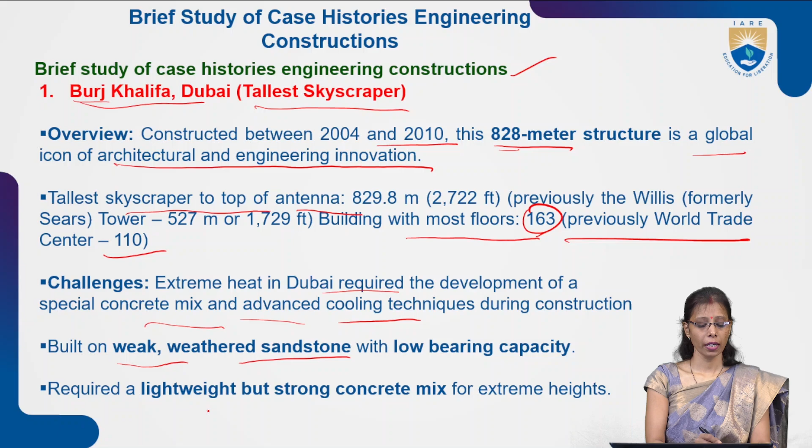The challenge to the civil engineer was the extreme heat in Dubai, which required development of a special concrete mix and advanced cooling techniques during construction. It was built on weak, weathered sandstone with a low bearing capacity, requiring a lightweight but strong concrete mix for the extreme heights. This was the challenge given to the civil engineer, but still they succeeded.

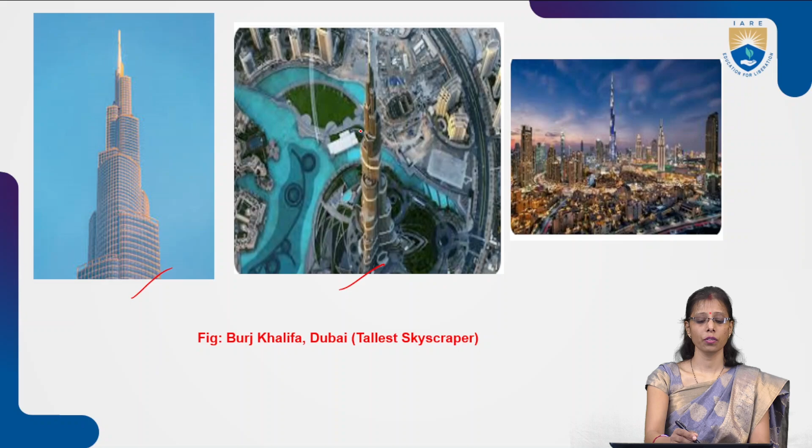This is the figure related to the Burj Khalifa. As you can see, it's a skyscraper. This is how the tallest building looks.

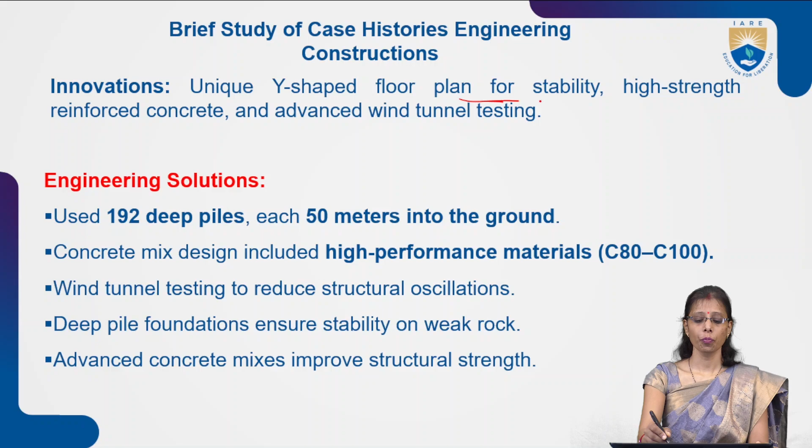The innovation here was a unique Y-shaped floor plan for stability, to make the structure stable. Why did they do this floor planning? Because they had already studied the geology of that area beforehand. That's why this building was successful, using high strength reinforced concrete and advanced wind tunnel testing before going for this construction.

The engineering solution used was 192 deep piles. Piles means they stabilized the soil, since it was sandy soil, by making small piles so the structure stands stable, each going 50 meters into the ground. They made a pile, then another with a difference of 50 meters on the ground, and so on, making 192 piles total to support the structure.

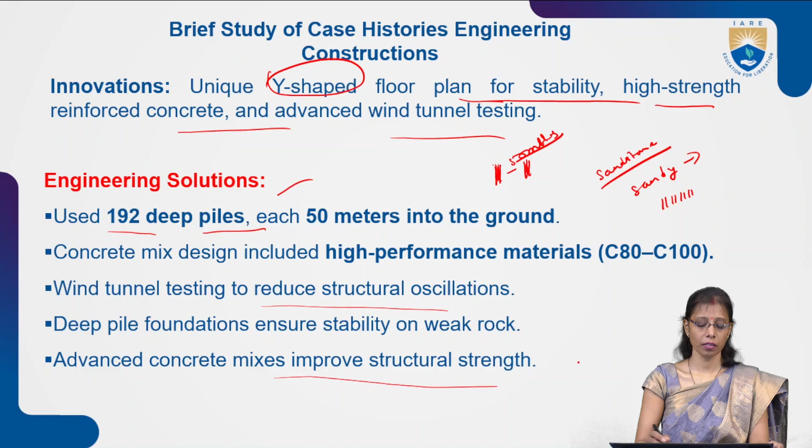The concrete mix design included high performance material, C80 to C100. Wind tunnel testing was done to reduce structural oscillations, and deep pile foundation ensured stability on the weak rock. Advanced concrete mixes improved the structural strength. This was the solution given to this structure.

Next we will see the second famous structure, the Three Gorges Dam.

This dam is known for the hydroelectric power project, located in China, completed in 2012. It is the largest hydroelectric project in the world, spanning the Yangtze River. The challenge to build this dam was the displacement of 1.3 million people, which was a huge challenge to civil engineers and geologists, and also an environmental concern.

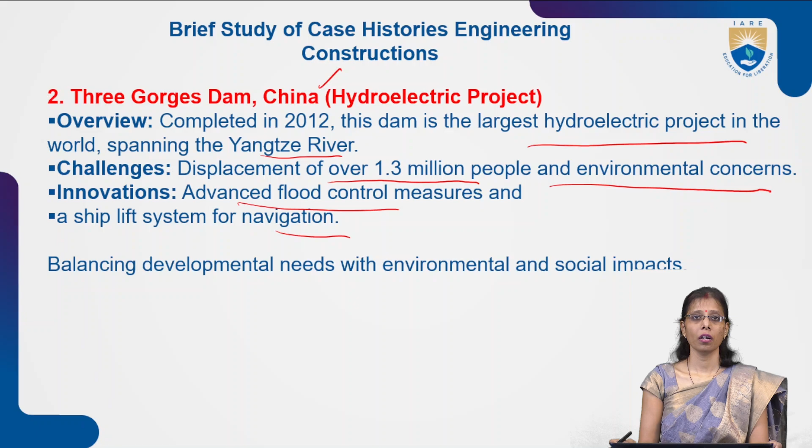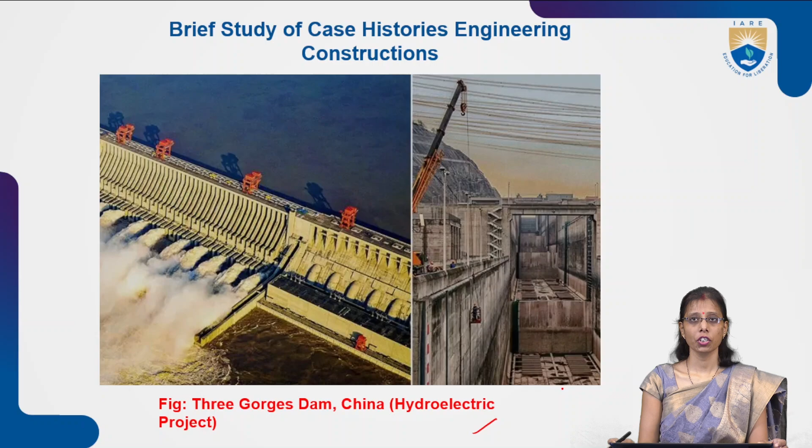Innovations included advanced flood control measures and a ship lift system for navigation, balancing developmental needs with environmental and social impacts. This dam is called the Three Gorges Dam, famous for hydroelectric power, located in China.

Next is the Millau Viaduct in France, a famous construction in history, known as the tallest bridge. It was opened in 2004.

It is the tallest bridge in the world, with pylons rising up to 343 meters. The challenge was building over the Tarn River Valley with minimum environmental disruption. Innovations included use of high strength steel, lightweight materials for the deck, and advanced geotechnical studies, effectively using technology to overcome geographical constraints.

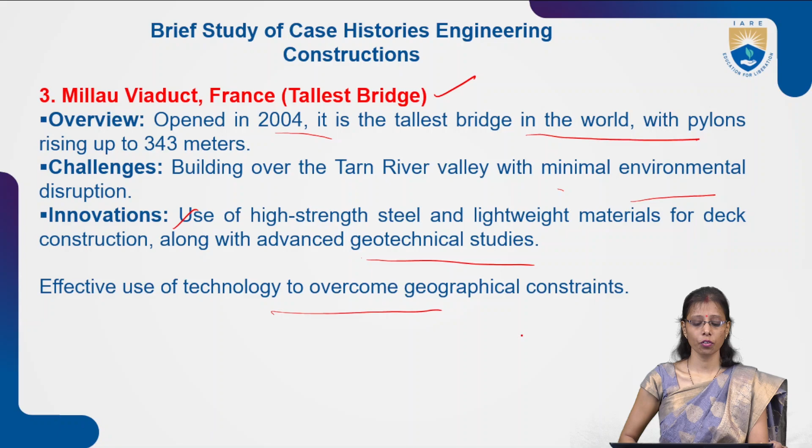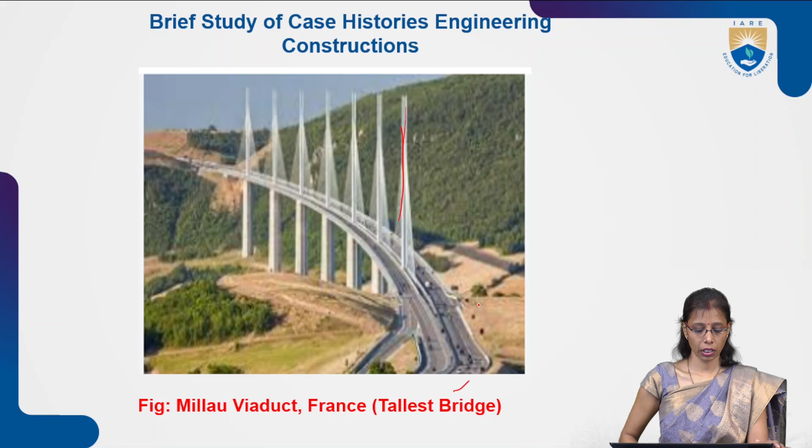This is the Millau Viaduct in France, the tallest bridge in the world, and a famous and successful construction in history.

Now we have the Channel Tunnel between UK and France, a huge underwater tunnel. Making an underwater tunnel was a huge challenge to engineers, and it was completed in 1994. The tunnel connects the UK and France through a 50.5 kilometer rail tunnel beneath the English Channel.

The challenges to civil engineers included managing water seepage, since the major problem in an underground tunnel is seepage, and maintaining alignment between construction from both sides, which was a very difficult task, but still it became a successful project in history.

Innovations included the use of tunnel boring machines and robust water sealing techniques. It also highlighted the importance of international collaboration and robust project management.

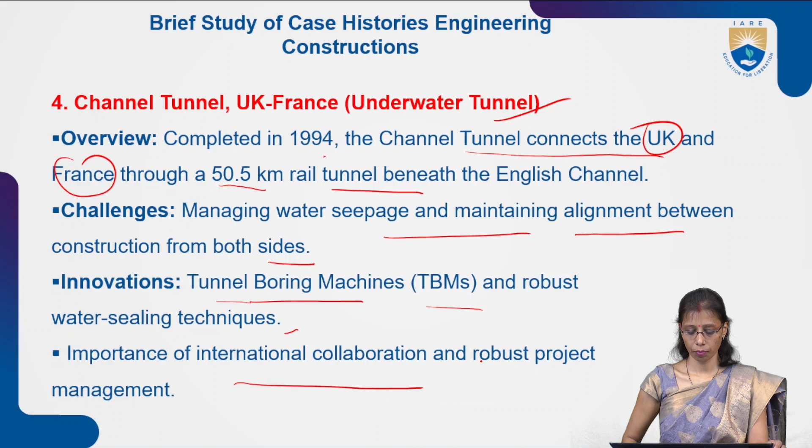Now the Sydney Opera House, also one of the famous constructions, known as an architectural landmark. It was completed in 1973.

It has a unique shell-like design and is a UNESCO World Heritage Site.

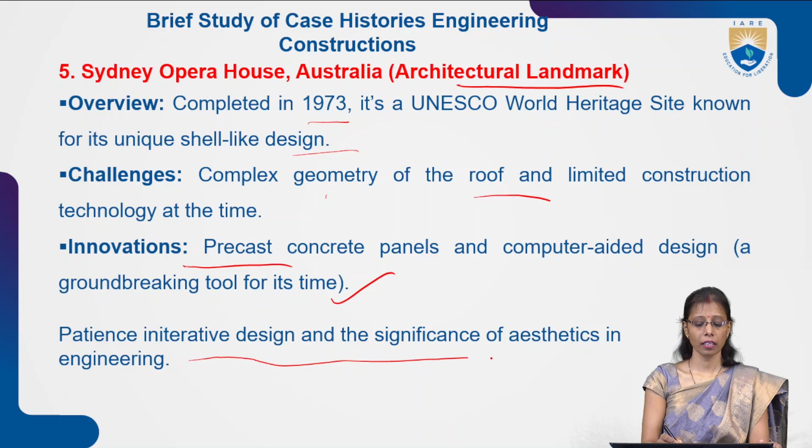The challenges given to this construction were the complex geometry of the roof and the limited construction technology available at the time. Innovations included precast concrete panels and computer-aided design, a groundbreaking tool for its time, showing patience in iterative design and the significance of aesthetics in engineering.

Next is the Gotthard Base Tunnel, a famous construction in Switzerland. The challenge here was that it is the world's longest and deepest rail tunnel, running around 57 kilometers beneath the Swiss Alps.

This was a huge challenge for civil engineers to construct a deep rail tunnel of 57 kilometers beneath the Swiss Alps. Construction involved overcoming geological uncertainties and difficult rock conditions. The use of tunnel boring machines allowed excavation with high precision, reducing environmental impact and minimizing risk.

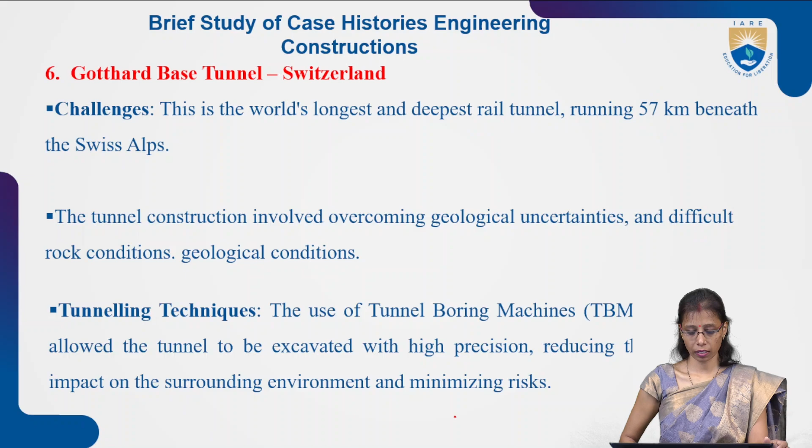Regarding geological surprises, engineers had to deal with unexpected geological formations, which led to changes in design during construction. This was a major challenge for civil engineers whenever such unexpected formations occurred.

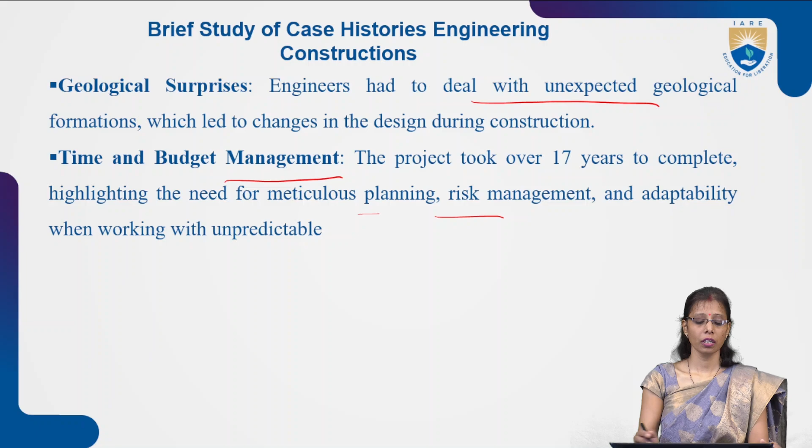Time and budget management were also challenges, as the project took over 17 years to complete, highlighting the need for meticulous planning, risk management, and adaptability when working with unpredictable conditions.